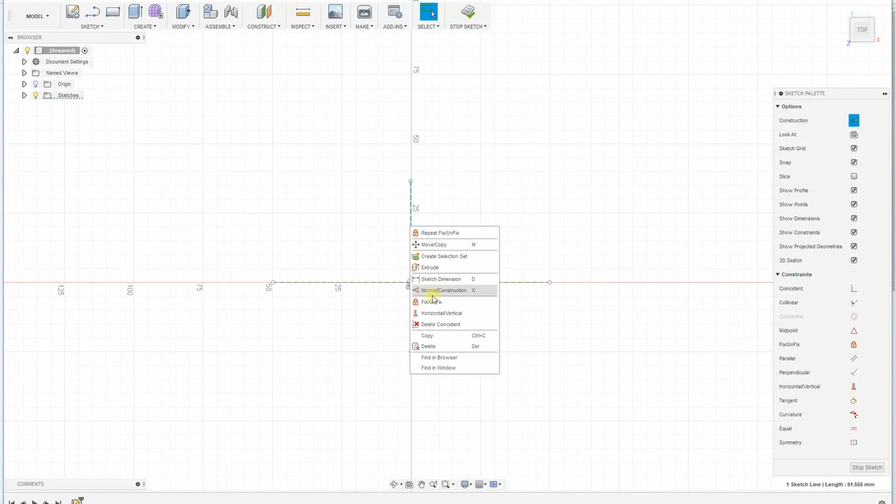And this is Fusion 360. This is sped up 4 times. So I'm starting a new sketch and I always start with the symmetrical lines, which I have to lock so they don't move. Then I draw a rectangle. Dimensions of the cards are rounded to 85 by 54 millimeters. And I make them symmetrical now in this moment.

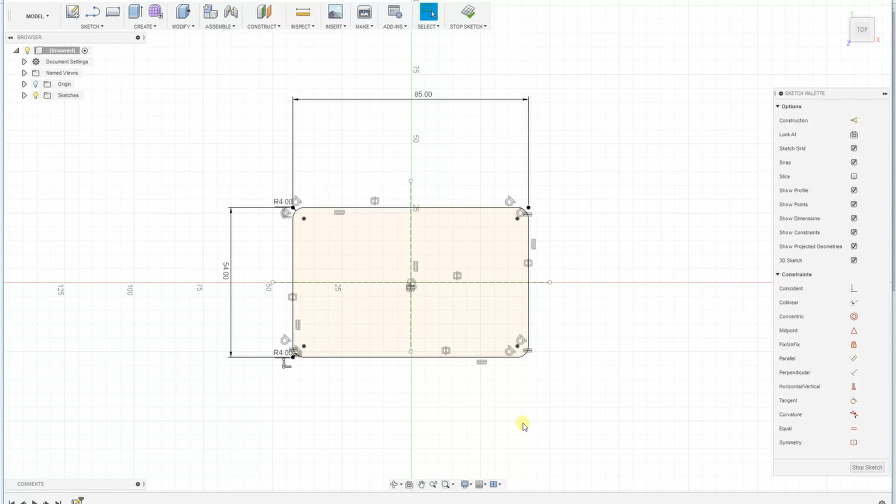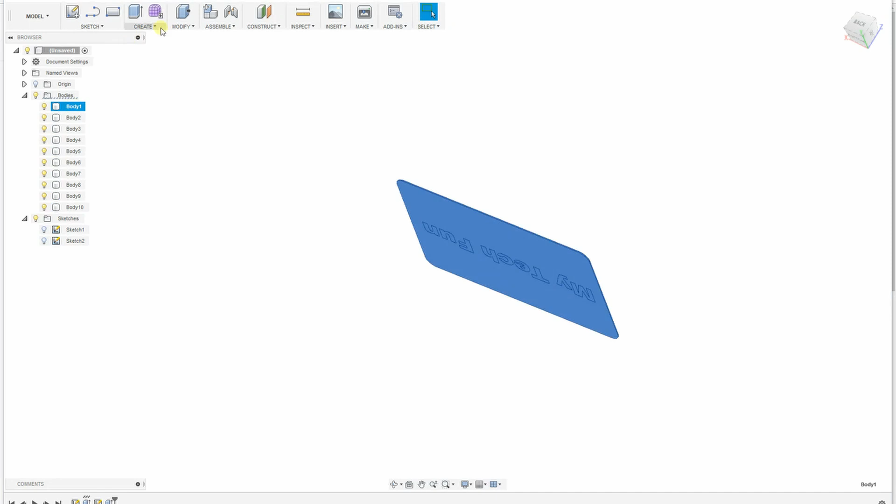And now I'm rounding the corners. I want to have 4 millimeters radius. And I'm extruding now to get the third dimension, 0.45 millimeters. And now I'm adding the text on the back side, which will be in the first layer. So this means it's very raw. You have to use here very big letters, and I'm cutting now from the previous body.

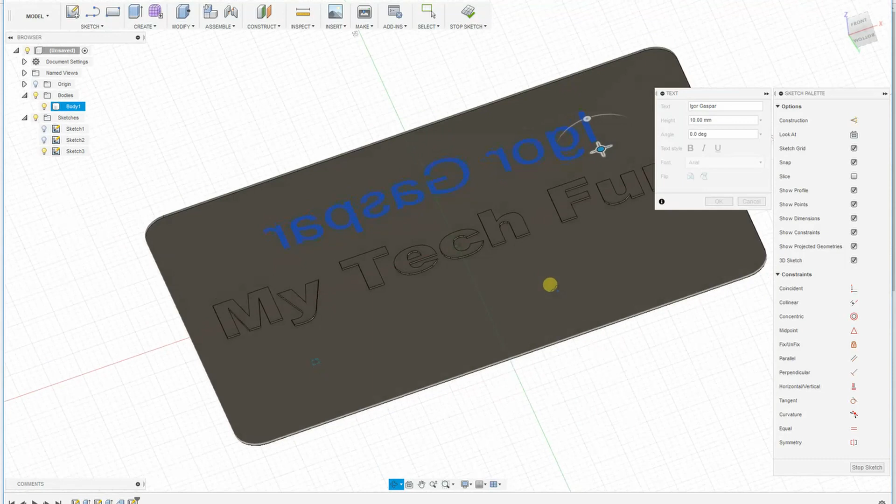And now this is the front side. I'm adding again the text. Well, I will jump here a few lines. Okay, so this is the text, and I'm adding now the frame border around this business card, and these letters will be out of the card.

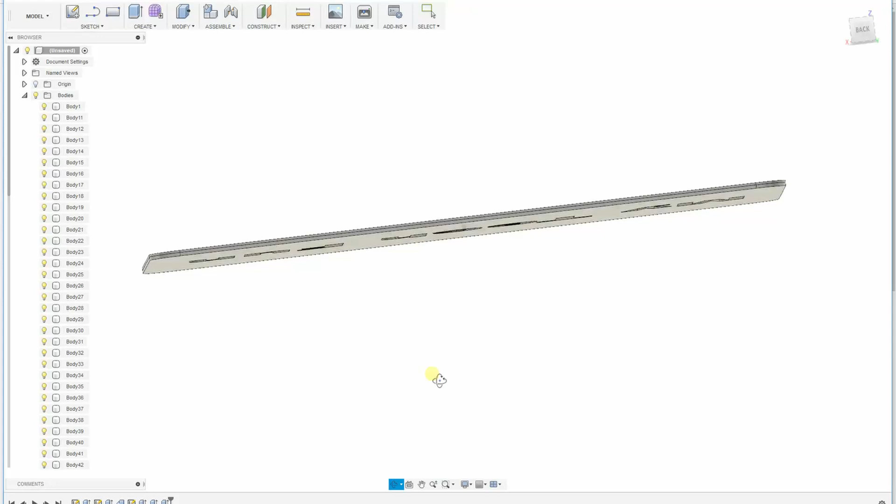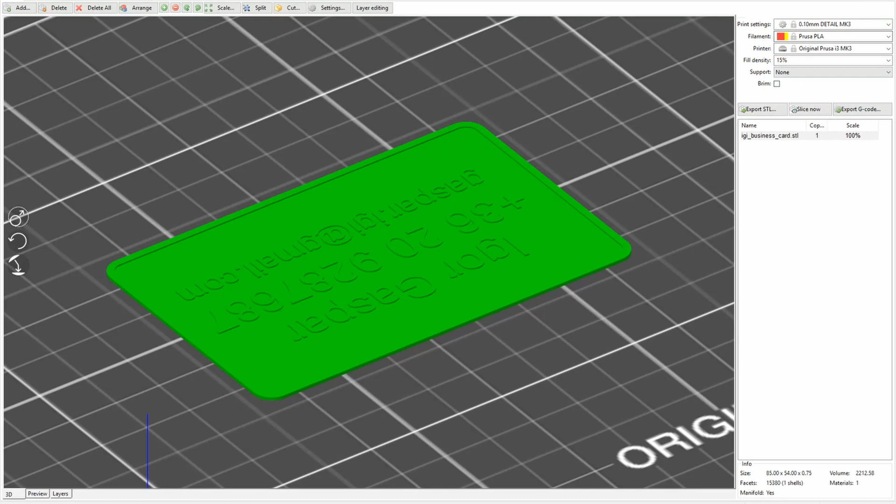And now I'm joining, because every letter has a separate body, I'm joining now these bodies, and this is the final version, and I just have to send it to printing, generating the STL files. And this is now the slicer. I'm using PLA, and you can see here my settings. I'm just checking 2 layers for each part of the card, and it's ready to send to G-code.

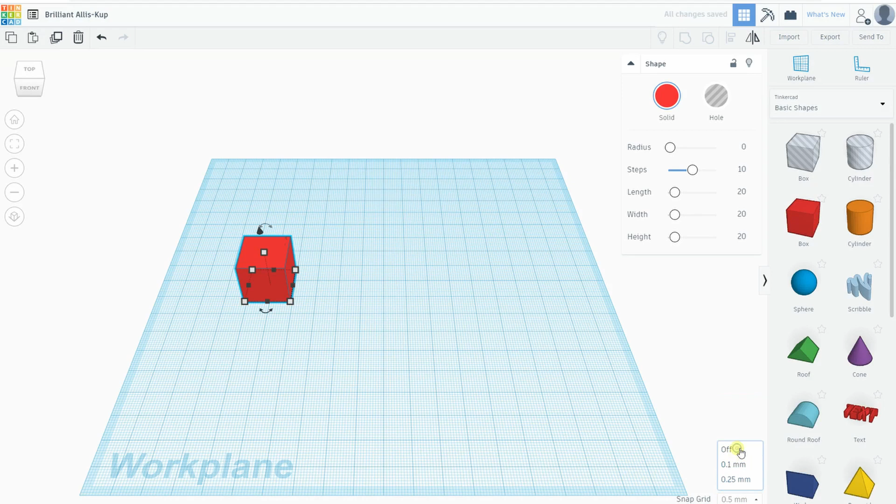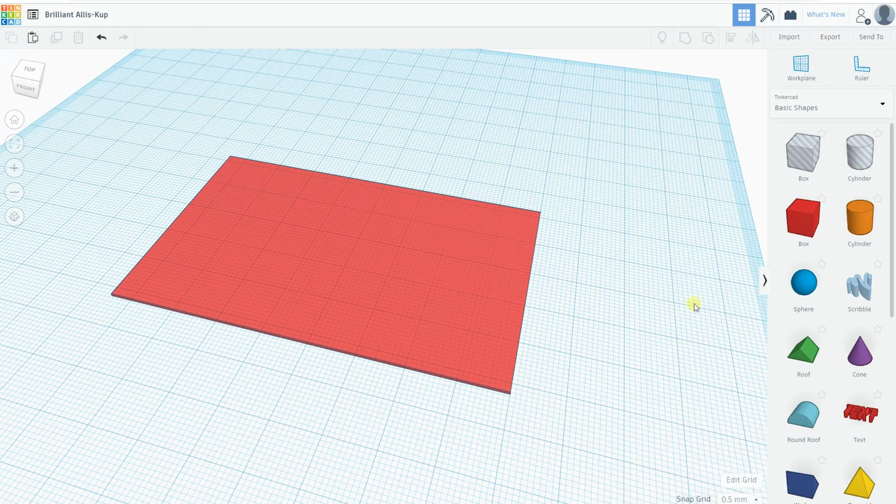Just a quick example of how you can design a business card in Tinkercad. So I will start here with the box, and I will give it the same dimensions, 85 millimeters by 54. And here the width of this is 0.5 millimeters. And in Tinkercad it is a very big problem to round the corners, so I'm missing this operation, the fillet.

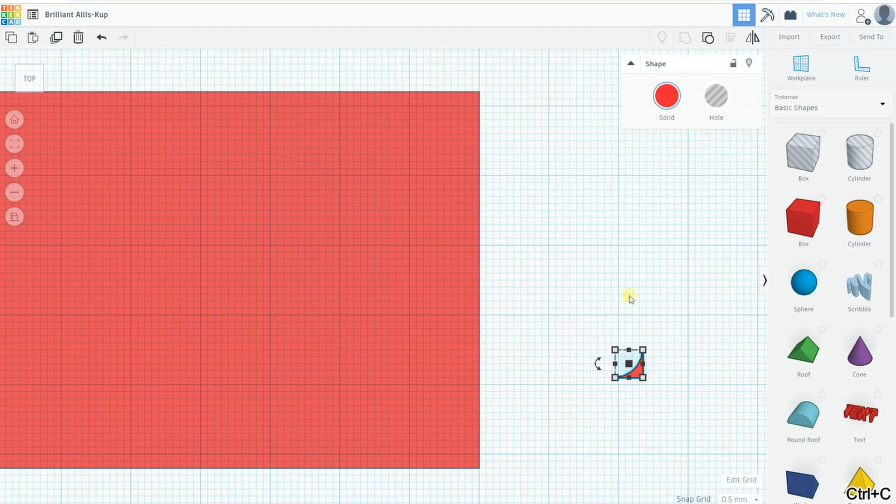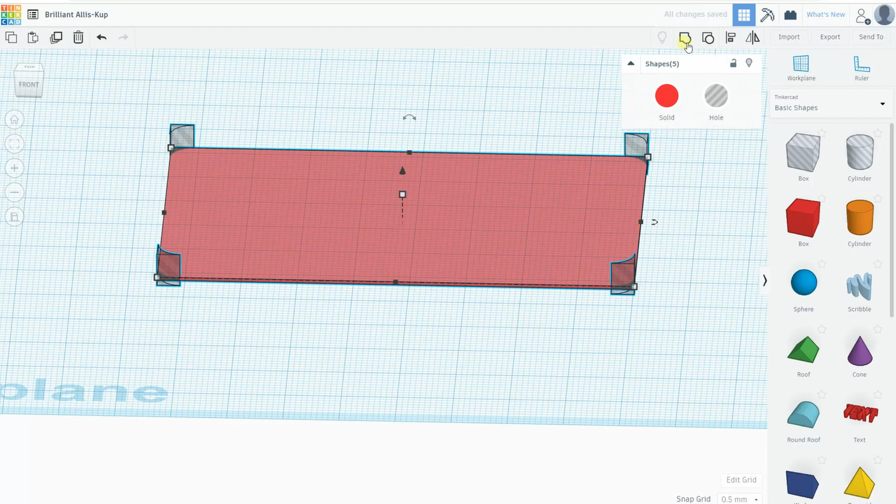It would be just one command, but here I have to create a rectangle, a box, and from the box I have to subtract a cylinder, and then I get these corners, which I'm just copying and rotating 90 degrees for every corner. I'm selecting them, grouping them as a whole, placing them on the corners, and then I will combine the body, and then these corners will be generated.

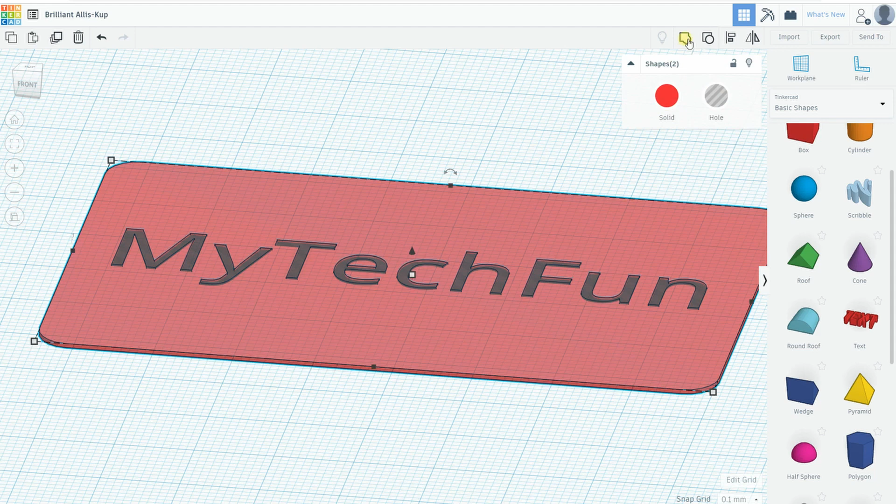Okay, I will just add some text now. If it is the background, then you need very bold text here, reducing the size of the text. And now if you want to make a hole in this card, then you select the text, make a hole, and combine them. Now it is a hole in this card. I will step back here, and if you want them to stand out from the card, then just select them as a solid and combine the body, and this is it.

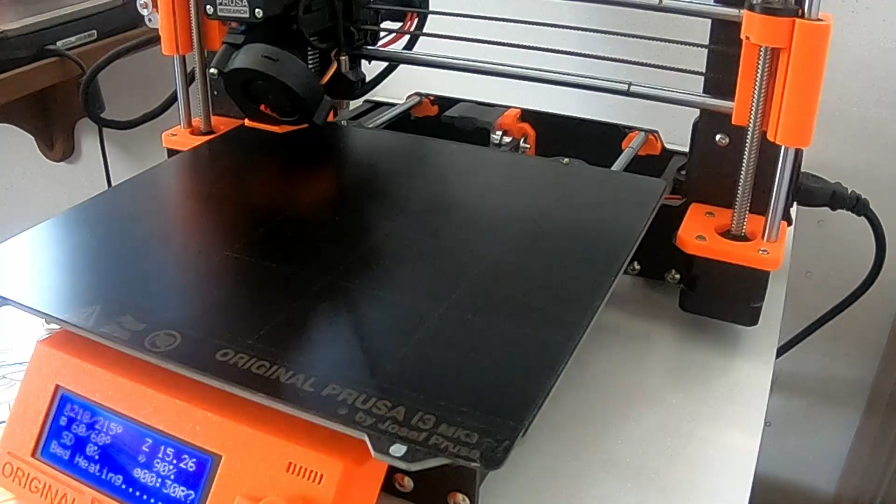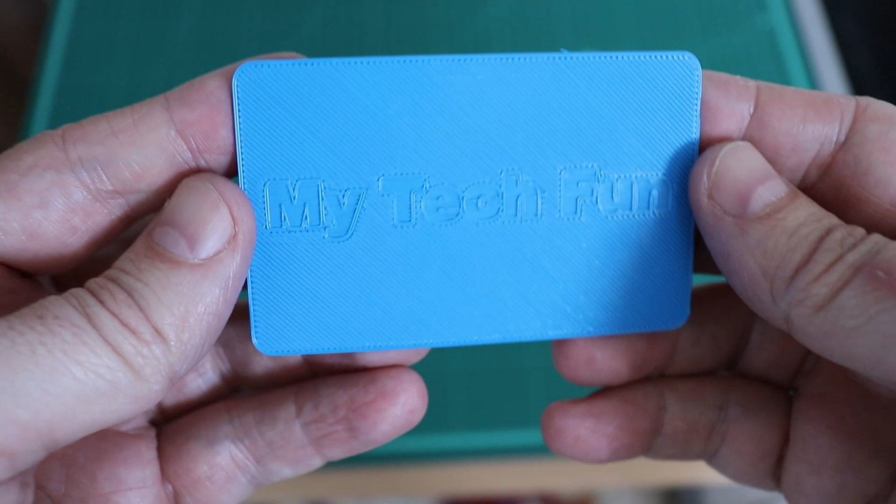This is the first layer, and as I expected, it is not so good quality. This is why here you have to use very big letters, very wide. And the other side, it's quite good. It's very good quality. Well, it is soft, but it's good for a business card.

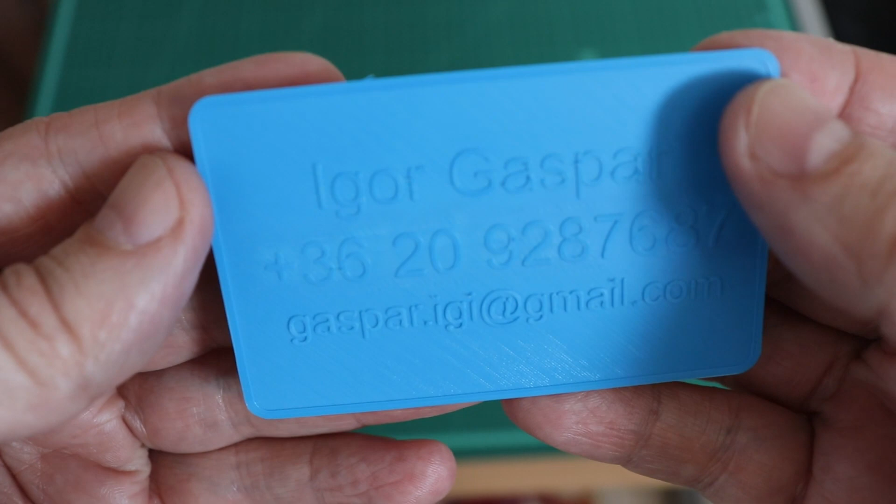And how much does it cost? Well, I used for this 27 minutes of printing, 3.19 grams or 1.07 meters. And if I calculate with $25 per kilogram of filament, then it costs $0.08. This means approximately for $1 you can print 12.5 pieces of this business card. Well, it is not cheap, I think, compared to these paper versions, but it is good to have this kind of business card for VIP customers or something like that.

Yeah. I'm very happy because this is my first attempt. What I don't like about this card is that it is a little bit hard to read, so you need some shadow or something like that. For example, even this paper business card is much more readable.

So I got an idea. I will try to print this in two colors. I don't have a special 3D printer, but when I reach the letters, I will try to stop the printing, change the filament, and continue with the new color. But that will be in my next video.